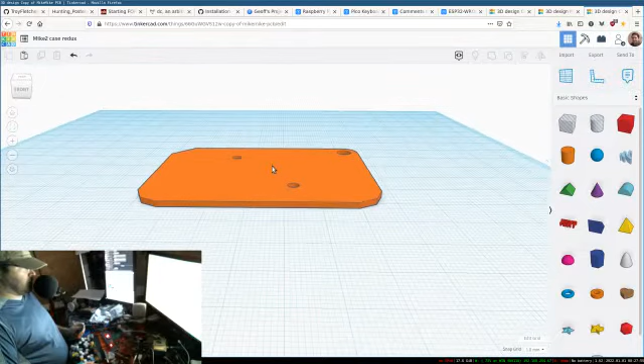Which I imported, I think from a DXF. Actually, I think it's an SVG. Yeah, SVG. And then extruded up to, I think, 1.6 millimeters. And all of this is going to be in millimeters, unfortunately. I don't know, engineering with millimeters just makes more sense. It's not very anthropocentric, but whatever.

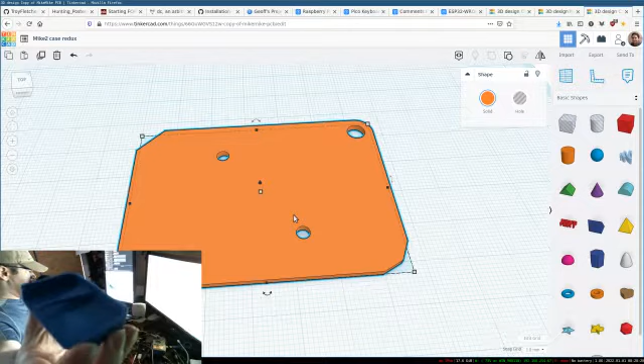So the point is to rebuild the MikeMike case, which was originally a little slide case. And the original is over here. And I'm having weird issues with it, and it's not fitting the way that I want it to fit.

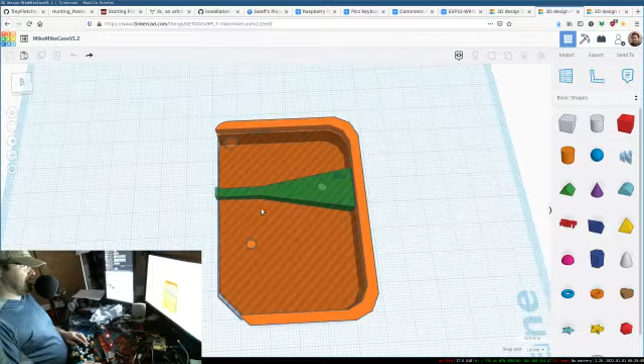And I'm realizing that I stopped. I kind of forgot how I put it together and why I put it together. Like this edge right here. This edge is supposed to meet this edge, but it doesn't. And this edge is not supposed to meet this edge, and it sticks out.

So it's basically a slide case for MikeMike for the circuit board. And it works out like this. And the case itself is just fine. It just needs a few required clearances to support different connectors on the back there.

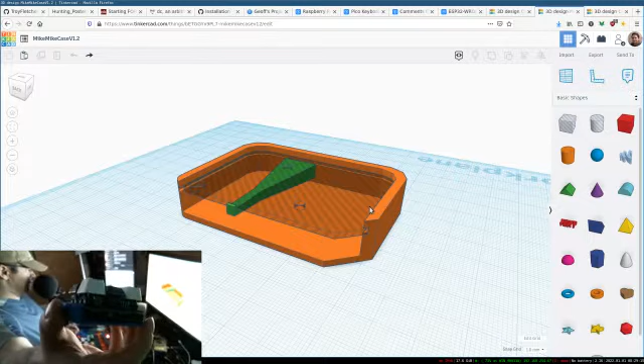But there's some improvements that could be made. And the more time I spent improving the original, the more difficulty I had and the more I was scratching my head. So we're just going to start from the beginning and see how quickly we can do this.

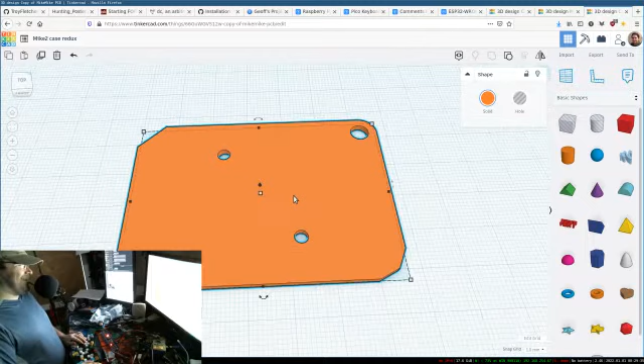Alright, so we're starting with the MikeMike circuit board. These are support holes that are cut out, which are a smart idea for any of your projects.

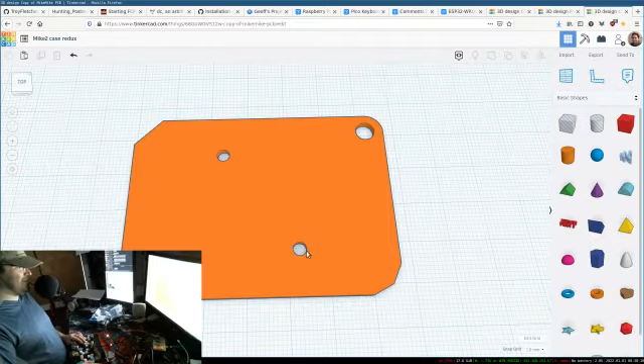However, let's see, you can kind of see that support hole. However, the support hole being right here, and the slide direction being like this, it slides in this direction, means that I've got a bunch of solder joints that are going to be right in front of that. So it's kind of a bad place for that, something to plan ahead for. This should have been down here, and this should have been up here, and maybe that'll happen on the next version, I don't know, but it's not important right now.

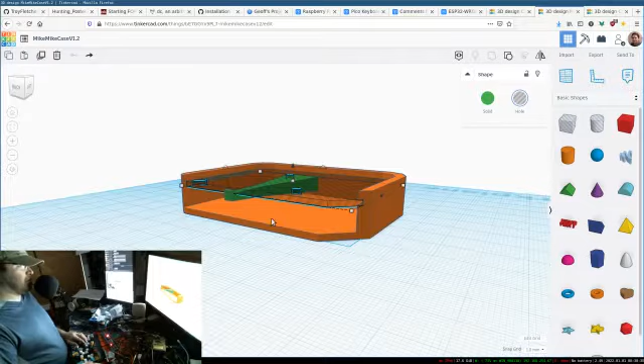So we've got our circuit board, and I would like to make, well, first of all, I'm going to cheat a little bit because I did figure out these dimensions. This circuit board height, the clearance that's in this area, this dead space, is important. So I happen to know this bottom part is 2 millimeters, and the height on this circuit board, how high it is.

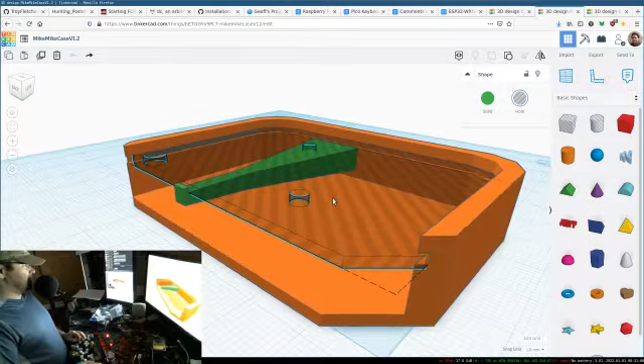This is TinkerCAD. I'm not sure if you guys are familiar with it. This is my guilty pleasure for when I actually want to do something really fast, just kind of bang out some CAD and not have to worry about it being super parametric and reusable and all that. So TinkerCAD is something I use, unfortunately, rather frequently, but it's just so intuitive. And yeah, I know it's hosted on an internet and you can't download it and whatever, but just, I recommend it. I don't like recommending it, but I recommend it, okay? It's fun to even just mess around with. It's very simple.

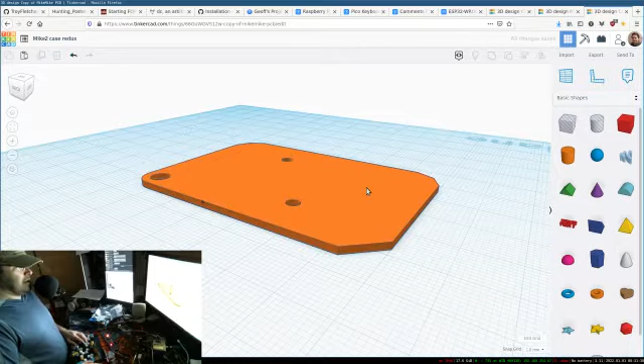So this measurement, this height that this circuit board is at, is 10 millimeters. So I'm actually going to make a copy of this. Color that one green. We're going to go up 10 millimeters. And as you can see, this number changes, but also this number over here. And if you've just changed it, you can click here, type in 10 and hit enter, and it'll adjust. And that allows you to make very specific, down to the thousandth of a millimeter adjustments. Even though I think this is only 2 significant digits, but whatever.

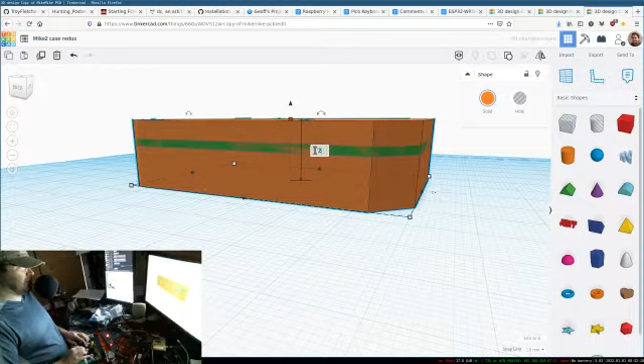Excuse me. So here's our circuit board, hovering where it needs to be. This thing was our original copy of the circuit board, but the base needs to be 2 millimeters. So this square dragger is actually something that extrudes. So I'm going to change that to, Control Z, undo. Change that to 2. There we go. And I'm actually going to remove the holes from here because I just want this to be a shape of the circuit board without the mounting holes. So let's ungroup.

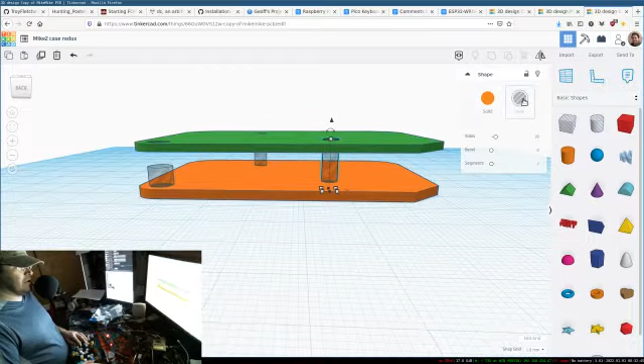Ungroup. And as you can see, in TinkerCAD, these shapes are accomplished by combining actual shapes and what are called holes. So you create a hole, and then you combine it with a shape, and hey presto, you get a shape with a hole cut out of it.

I'm just shift selecting these and deleting. Now we've got a plain face right here. Should be exactly the height, it should be 1.6 millimeters, so that one's 2 millimeters. Now I'm dragging it down. That makes sense because this is at 0.

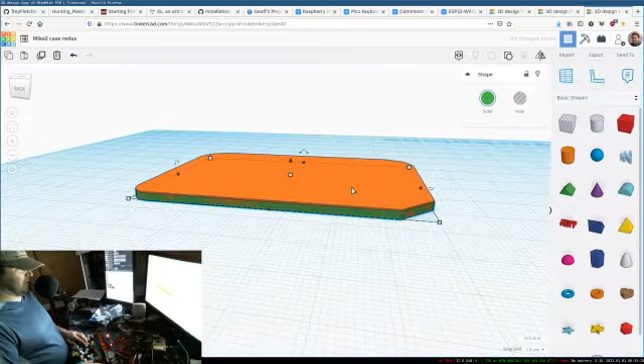Let me undo that. Alright, so we're still at 10, right? Yeah, still at 10. This one should be 2 millimeters tall, and it is, and it's exactly in the same footprint.

So what I want to do is add probably 1 millimeter, actually probably 2 millimeters. Let's give 2 millimeters edge around the circuit board. There's a couple ways to do this, but the way I like is the easy way. If I stretch in this direction, holding shift stretches in ratio. If I hold alt, it stretches both sides. Let me undo that.

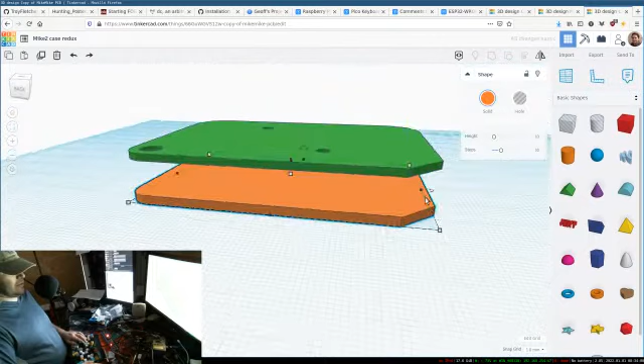There we go. This actually has the same thing where it shows you the delta. So I'm going to hold alt, 1, 2. It actually doesn't show me the delta. Okay, I was wrong. So we're going to look at our horizontal length, and that's 66.68.

Right, 66.68. We're going to add 2 millimeters because we're extending 1 millimeter on one side and 1 millimeter on the other. This will be easier to visualize if I move this down. There we go. Actually, you know what, let's just do both on both sides here.

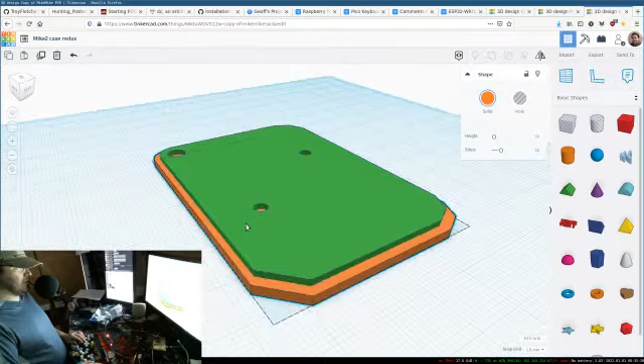Alt Shift, got 66.68. I'm going to add 2 millimeters and 2 millimeters, that's 4 millimeters. Oh, that worked, that's surprising. Alright, so now I've got 2 millimeters. Actually, I've got 2 millimeters on the long side, not the short side. So we do have to do...

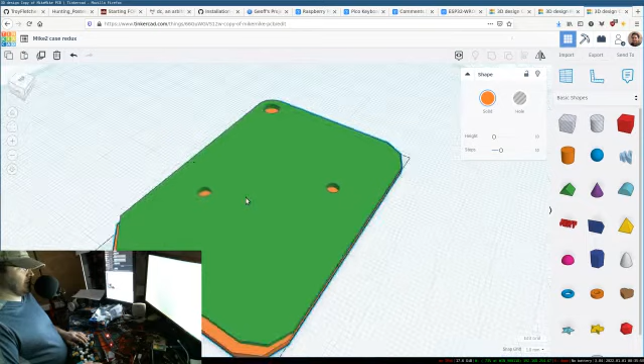66.68 plus 1 millimeter plus 2 millimeters. I'll grab one over here. Can't see the number. 47, 48, 49. That's not right. Am I not smart?

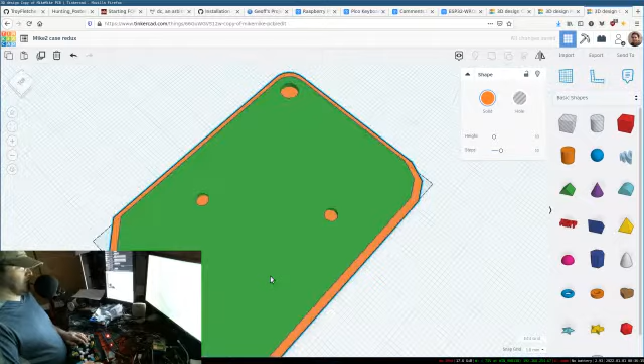I'm doing 2 millimeters on both. Yeah, right. So here we've got a nice edge, just a little bit of bonk coverage. Now we'll put our circuit board back to the appropriate height, 1 to 10. Alright, now we've got our base.

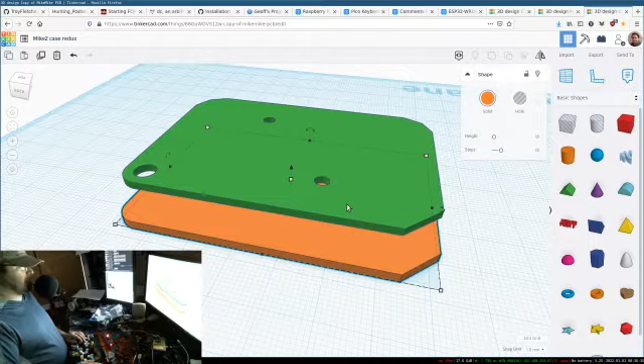And so we want to rebate on this. Let's put that back down. Let's make it, yeah, that looks right. Let's make a duplicate of this. We'll go back to the original size. I think that's it.

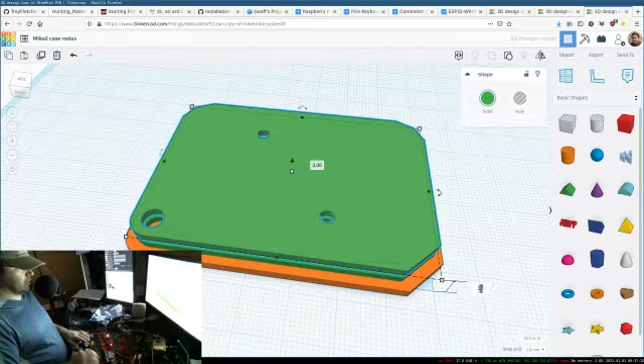Not quite. It's just a little off. I'm not sure why, so I'm just going to duplicate this circuit board again. This one back up at 10. There we go. And this one will give a 1 millimeter lip, let's remove our holes again.

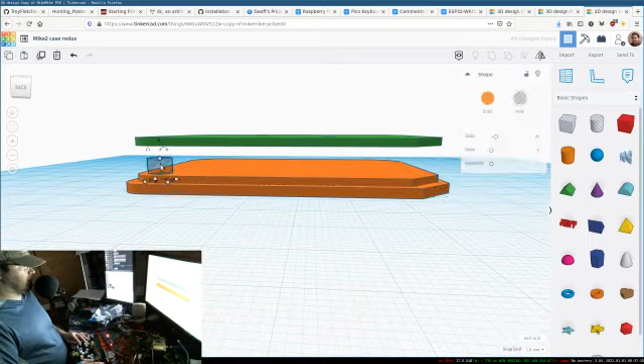Hey, there we go. And we'll give that 1 millimeter and Alt-Shift resize. Oh, that's interesting. This actually might be why I was seeing issues with this one. It doesn't appear to resize the same directions on an Alt-Shift resize. That might explain why I was having issues with the last one.

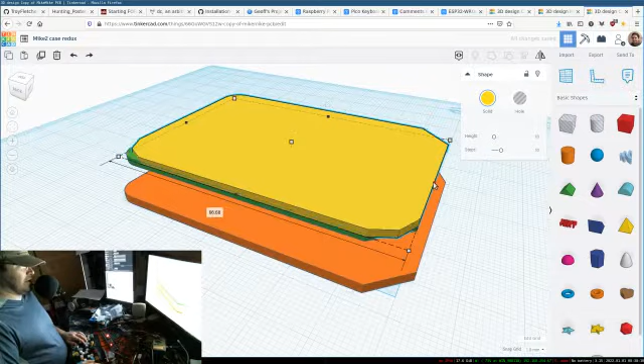Anyways, let's go down 1 millimeter. That's actually 0.5 millimeter because we're doing it on both sides. No, I was just dragging one side, never mind. 65, oh, 64. Oh, that's not right.

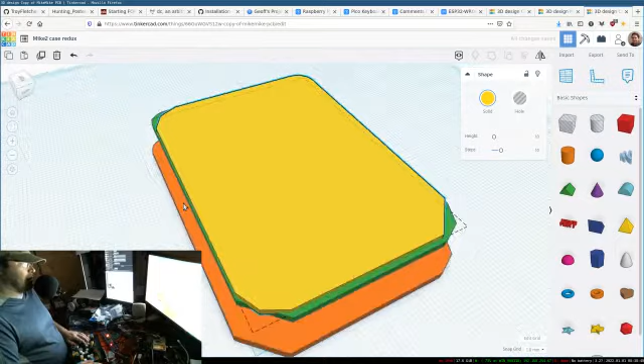65, 64. Undo. You see some of the significant digits get lost on some of these resizes. And that's the downside of not doing it parametrically.

What on earth? You see that? Look at the shape, it rotated. This edge is right here, and now the edge is over here. So TinkerCAD, huh? You're talking about how much I like it, right?

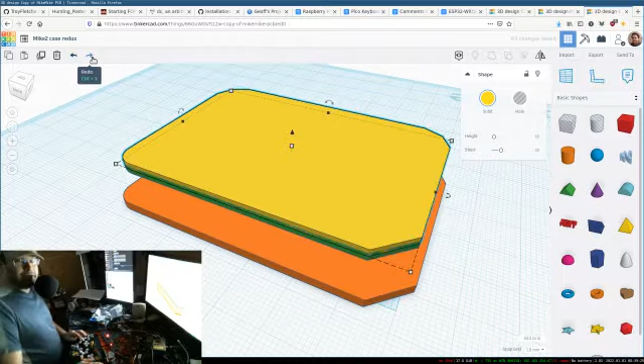Literally, 65, 68. Is it 65 reduced to 64? No, I see what you're doing. 65. But it's so much faster, you see. Yeah, I'm eating my own words here. Alright.

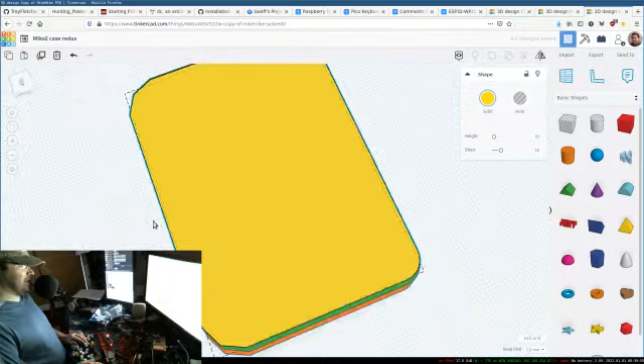47.63, change that to 46.63. And then on this side, 46.63, we'll change that to 45.63. There.

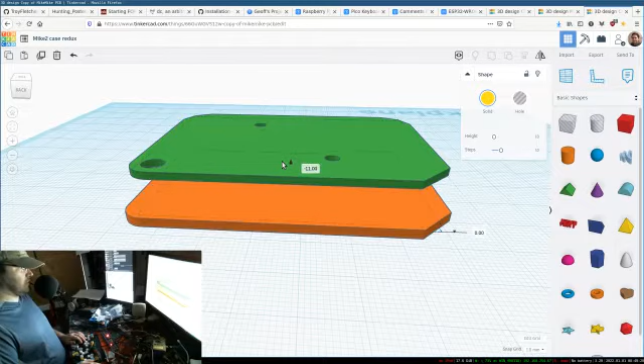So now we're going to use this as a cutout for the internals. And you go back to, this is our hole. It needs to be 2 millimeters up because the device itself is, it's not 1.6, it's 2. There we go.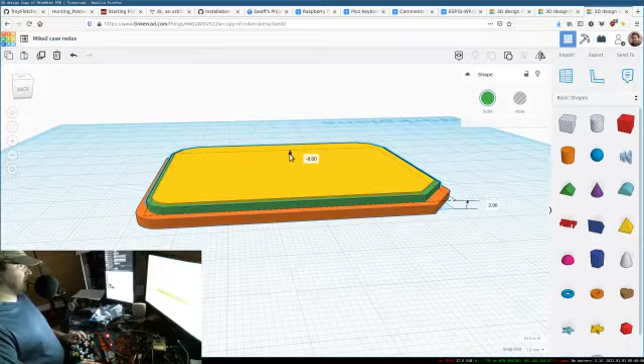Alright, so you kind of see how this is going to work. The circuit board's going to have that outside edge and then this inside edge cut.

Whoops, screwed that up. See, this is what I'm talking about, the mouse. Mouse is imprecise. If it was parametric, I would be done. That's not true. I would still be shaping this all out.

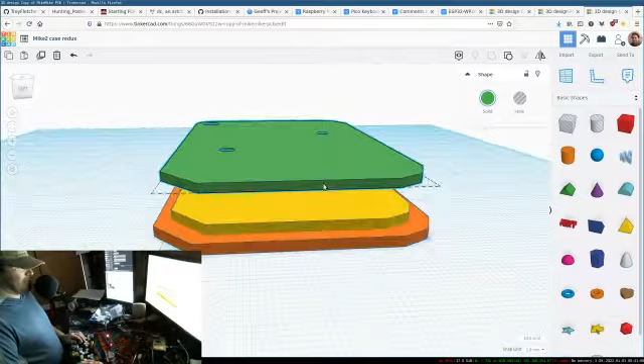All right, so here's our case. This is going to be our hole, essentially. I'm going to extrude this upward. That looks good.

Like I'm moving my head, like I'm turning, like I'm looking around the back side of it. That helps, that helps when you're doing this stuff.

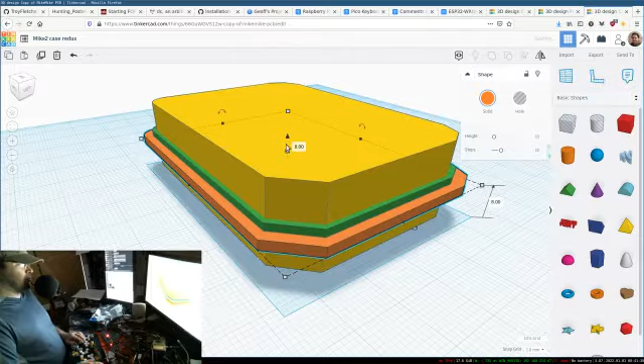All right, so now we're going to extrude up to, oops, I said extrude, 1.62. Now we're 0.2 above the circuit board. 0.6 or 0.4 above the circuit board.

And I kind of want to go to the height of the buttons, which I might have already measured. But height of the button edge so that we can do like a plate thing if we want to. And the height from the base to the plate mount is, that's probably 0.2.

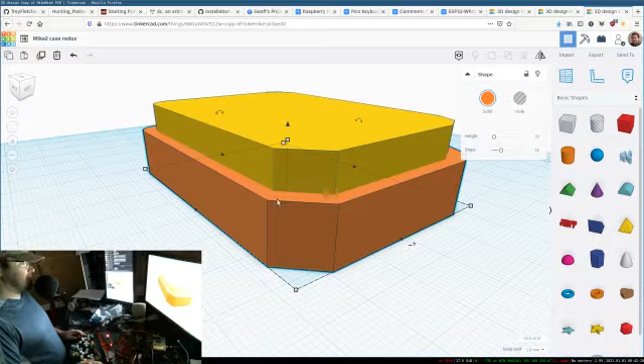Yeah, it's probably 0.2. That is one of the good things about having these standard imperial unit measurement calipers. When you get a measurement that was something for something created in Imperial, and your measurement is really close to a round number, you can pretty much just assume it's that round number.

But we still need to point to our millimeters. So 0.2 inches into millimeters, 5.08.

All right, that means our height here should be, well, now it's above the circuit board. The circuit board is 10 millimeters up plus 1.6, which means the height of this should be 10 millimeters plus 1.6 plus 5.08, which I'm not going to do the math for.

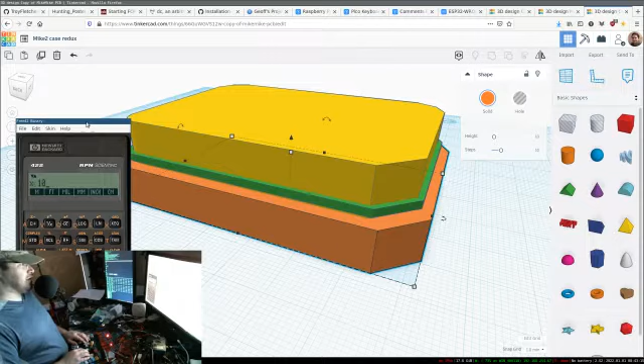Let's say 5.08, 10 plus, and then 1.6 plus, yeah, 16.68. Now we extrude this up, 16.68. Cool. And now it's completely blocked off because my internal cut doesn't have an opening for the front.

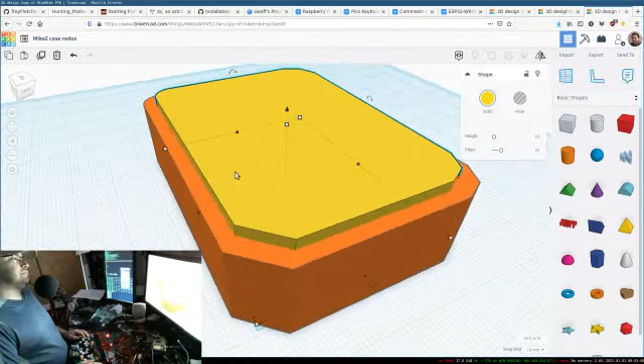So I can't just extrude this forward, because if I do that, this angle gets messed up. So I'm actually just going to make a copy of it and move it forward. Duplicate that, move it forward. Then we'll combine these.

Good, and now we'll make this shape a hole. We'll cut it out of the orange shape. Ta-da!

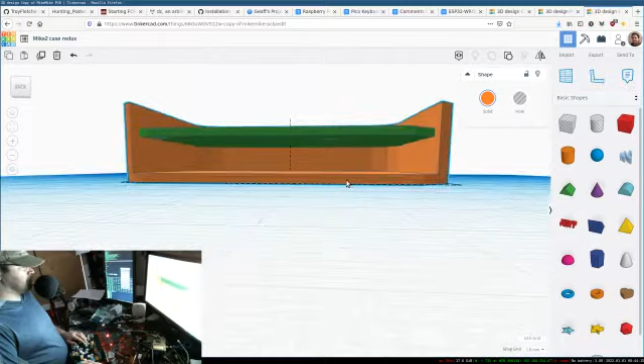The total height of this, 16.68. And let's just do a little sanity check here. Well, 16.68 millimeters, and we'll change that to inches. So 0.656.

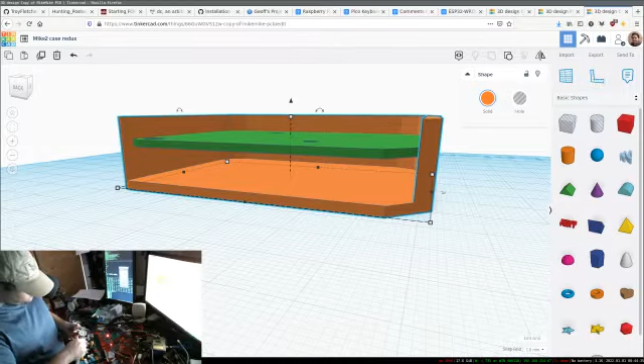That means that 0.656. That should be right about perfect. That looks good. Sanity checks are important.

So now we're going to cut out of this the slide for the circuit board. And well, yeah, let's just make a duplicate and another duplicate. We'll move one of those duplicates out and leave the other duplicate where it is. Because again, if we cut it out here, we'll lose this edge.

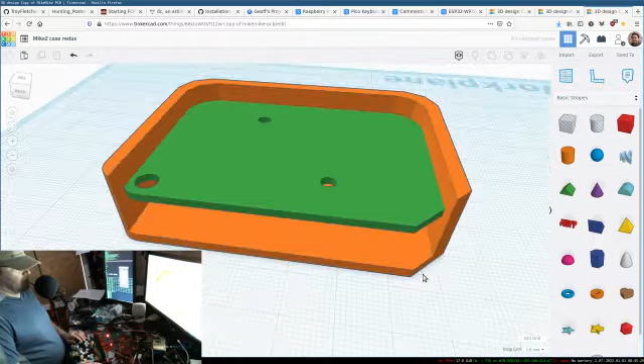So if I turn this into a hole, it'll just be captive, which might be interesting, but it's not really what we're going for. Take both of those, turn those into holes, and combine them with this orange piece, the body piece. So there we go. This is the original circuit board.

We actually might want to add a couple. Yeah, let's do that. That one's a hole, this one's a hole. We're going to add 0.4.

So if I extrude up, it's actually going to be a little less, unless I extrude in both directions. So 1.6, let's add, I mean, 0.2 of a millimeter is a little tight. Let's add an entire millimeter.

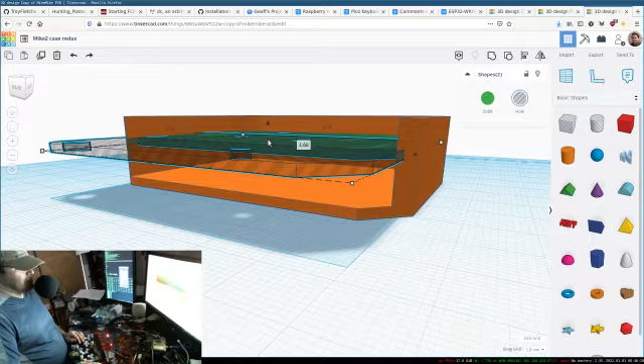So let's go down 0.5 millimeter and then, well, we're cutting in both directions though. Tell you what, let's combine these shapes.

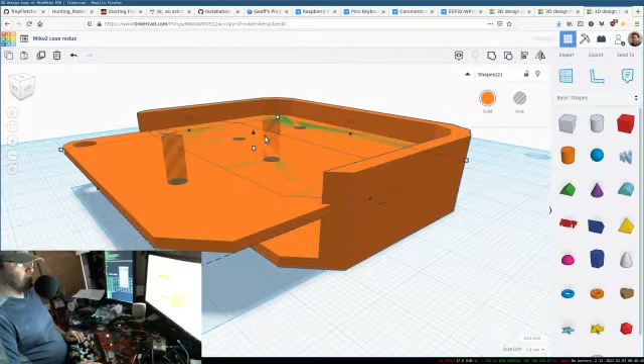Sometimes Tinkercad takes a little bit to catch up. These should still be holes. Oh, I pushed the wrong button. Yeah, group them, not ungroup them. Alright.

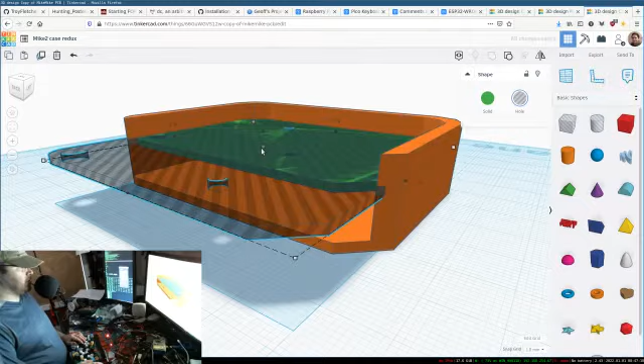So now we'll take this and duplicate it. So now we've got two of these slide rail cutter things that we want to move. The first thing we're going to do is extend this one up 0.5 millimeters, which would be 2.1. Extending upward direction, 2.1.

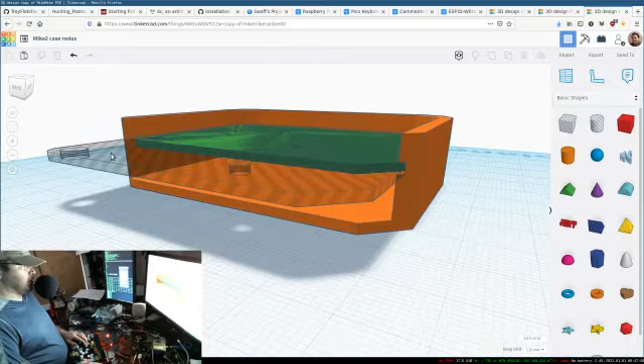And now we're going to cut that. Good. The original cutter still has the same bottom as the circuit board. We're going to move that one downward. You see we're extending in different directions based on the camera angle. So if I go this way, the extrusion takes place toward the camera. So 1.6, we're still extruding down an extra half a millimeter, so that would be 2.1 again.

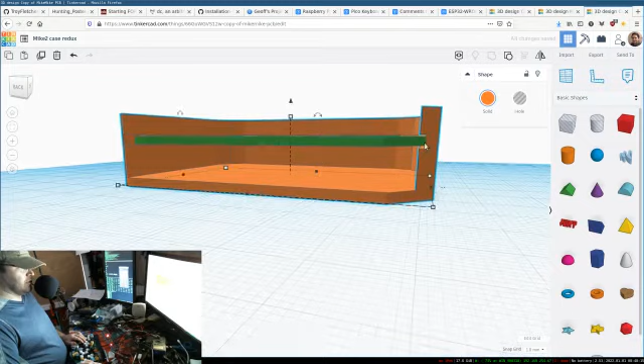There we go. And now we'll combine that with the body. And hey presto, we've got 1 millimeter of clearance in both directions, assuming the circuit board stays in the middle, and...

I should probably give it a little bit on the edge. I don't know, it might be a tight fit. I might like that. Yeah, let's try that. So let's start here and see how that works.

So that's already saved. I'm going to go ahead and, just because I want this to be part of the unit when it's completed.

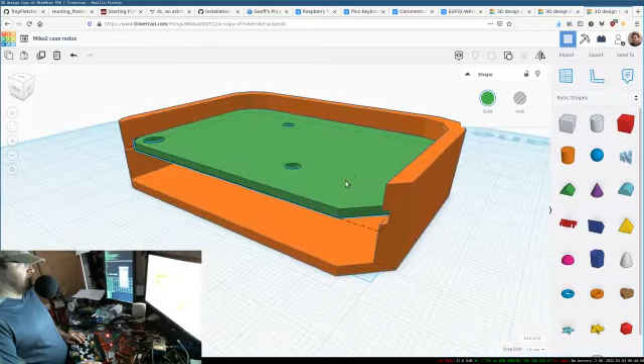So Tinkercad relies on a combination of shapes, grouping of shapes, removing shapes from other shapes. So if I just delete this and then save it, I no longer have a circuit board object in here. I still have these cut objects, which might still be useful, but I would rather have the circuit board just floating around in there.

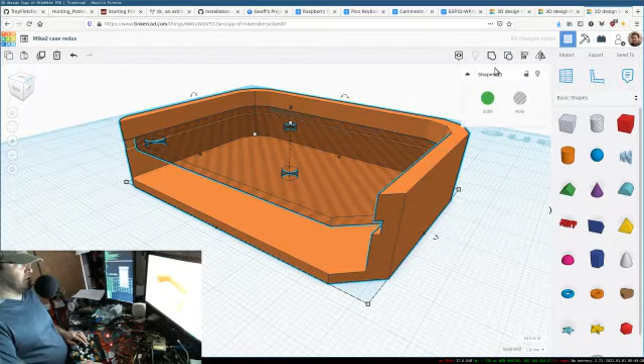So even though there's no contact with the cutting surface, I'm still going to take this original circuit board, make it a hole, and then combine it with this. This actually won't remove any material.

And we'll see how that works, because when I come back to this, if I want to mess around with it, I want to be able to pull up that circuit board again, and I can. All I have to do is ungroup, and it takes the last grouping that took place, and removes it. So it's like a history of grouped objects.

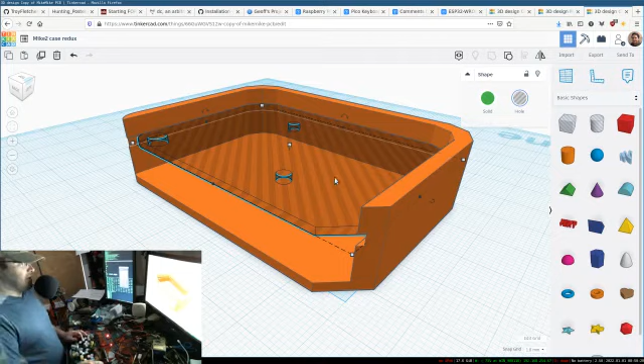And if you do a lot of grouped objects, this will get very, very slow. So it is highly recommended that you save or export complicated objects as an STL, and then re-import it, because that simplifies the geometry. Instead of telling Tinkercad to combine the last 10,000 shapes you made, you've collapsed those shapes into one finalized STL 3D object, and now you're taking it out and putting it back in as a single object.

So that's a hot tip for Tinkercad. But I think we're just about done here. There you go. That looks a little weird. Why does that look weird? Looks like we've got a little bit of an edge here. This right here.

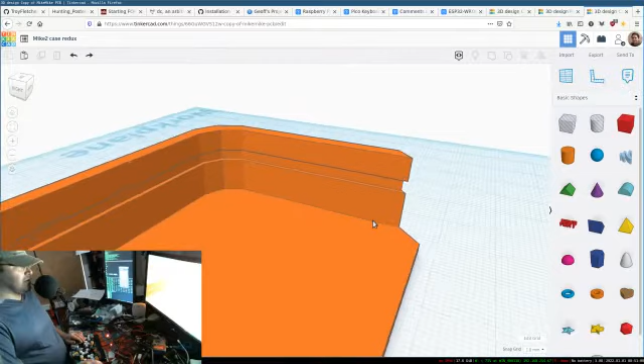It's got a little bit of an offset. That's where the cut took place. And yet there's not another one over here. So it can get a little sloppy sometimes, and that's not a huge deal. It's just a little disconcerting.

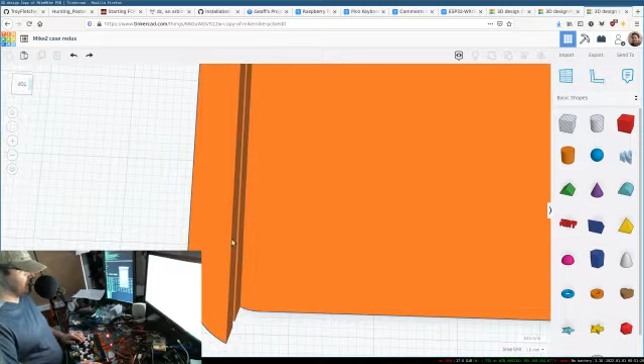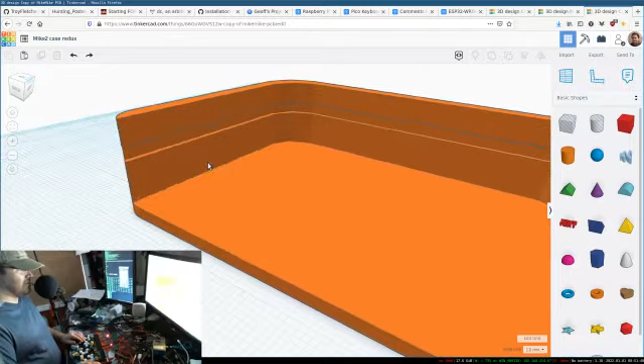But for something like this, it isn't super high tolerances, and again, it's not something that really needs to be parametric. Yeah, you can see this little edge here. I am interested why this happened. So one of those cutting circuit boards that I made and then extruded forward, when I pulled it forward to extend the cut to the edge of this lip, it resized slightly. So obviously Tinkercad is very useful, good for quick stuff, but still wanting in some ways.

So that was quick, allegedly. I see 24 minutes plus explanation. I'm gonna call that pretty good. And we'll see how this looks. It's a little bit chunky. I don't know, we'll see.

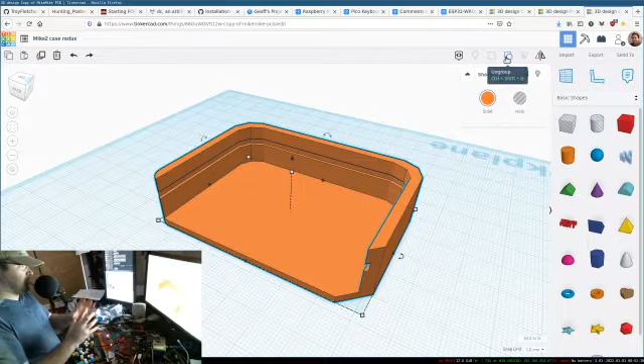I can come in here and ungroup all of these objects and break it back down to where it was before, and then resize one thing and then reassemble it. It's very useful, quick, kind of quick and dirty stuff. But we'll see how this comes out.

24, like I said, 24 minutes, not bad, and hopefully some introduction to Tinkercad. Highly recommend it. It's fun to play around with and very, very accessible. So it is very uncomplicated. Highly recommended. So I'll print this out and see how it goes.